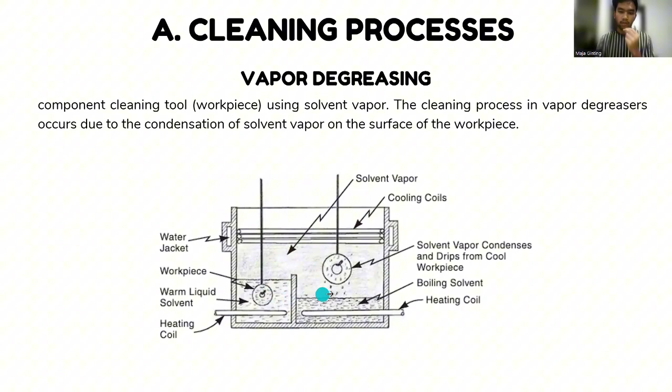Okay, and the next is the polishing process. The purpose of polishing operations, in addition to improving appearance, is to aid fluid flow, to remove burrs, to provide clearance for assembly, and to remove surface indentations that could be stress raisers or sites for entrapment of corrosive substances.

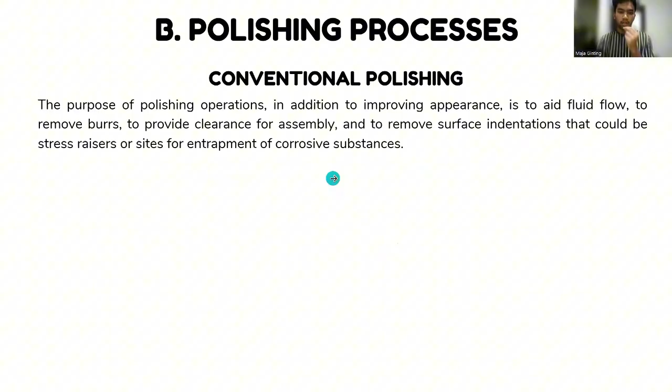Next, this is the plating process. This is the same as before. This is conventional electroplating, the process of coating a workpiece with another metal. This uses DC electric current. The electric current forces an oxidation reaction at the anode. This is the anode or plating metal, and this is the workpiece,

and the electrolyte in the box, and then this DC voltage forces the anode and makes the electrolyte and cathode react so that metal is deposited on the workpiece.

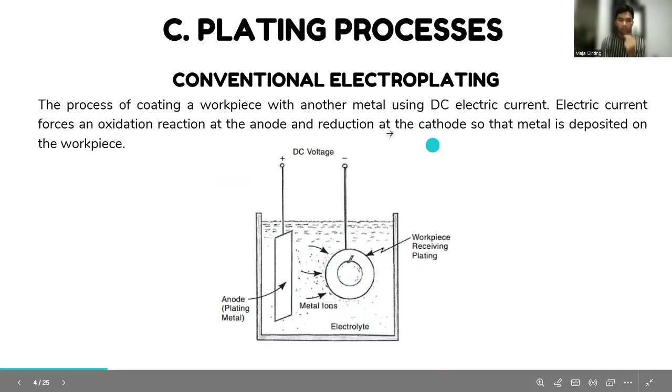Okay, next this is painting, organic finishing. In this illustration, there are the valve and pressure air. This is the paint. This makes a curtain of paint. A coating method in which liquid paint is pressed out to form a falling curtain. Then the workpiece is passed through the curtain so that the surface is evenly coated.

In this illustration, we see the pressure air. The pressure air passes the valve and makes the paint move vertically and makes the curtain of paint. Before that, there are a stationary knife and an adjustable knife to cut and make the opening smaller or larger.

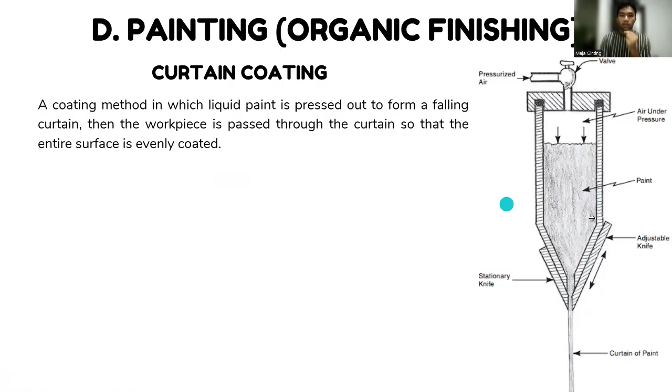Next, this illustration is about electrostatic spray for powder coating. This is different from before. This uses air to propel the paint powder into the spray gun, where it is given a high electrical charge and then sprayed onto the grounded workpiece, and this is the workpiece. Electrostatic force causes the powder to adhere evenly, then melt in an oven to form a hard, durable coating.

In this illustration, we see the compressed air input, then the powder hopper and the compressed air control valve. To make all of this work, this is the high voltage cascade generator and the negative to the ground.

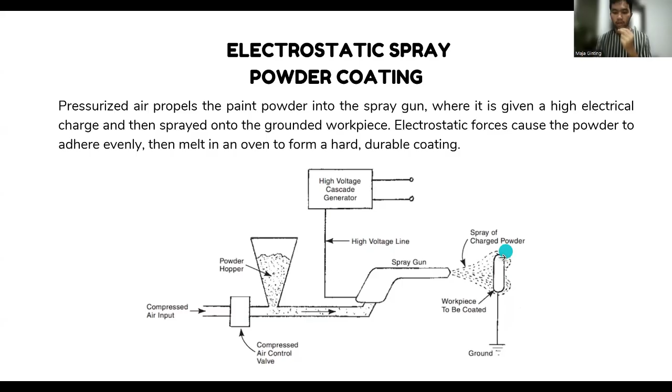And this is fluidized bed powder coating, another method. In fluidized bed powder coating, compressed air is used to float the powder in a container. We can see in the illustration there are many parts of this component. The main part is the input air passing through the porous ceramic plate vertically, and this input air goes to the plenum chamber and through the ceramic plate,

and this workpiece is heated above the fusion temperature of the powder. And this is the fluidized powder. The powder sticks and melts on the surface of the workpiece, forming a protective layer after cooling.

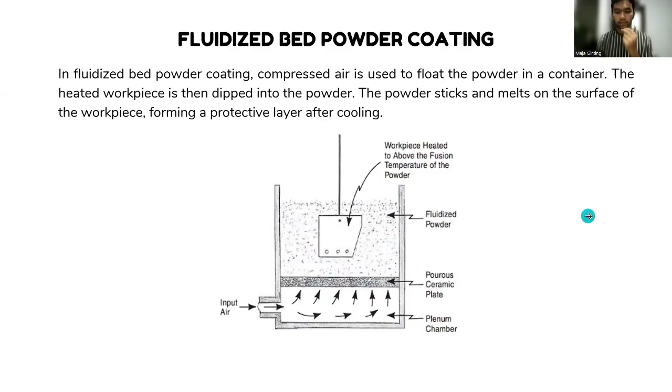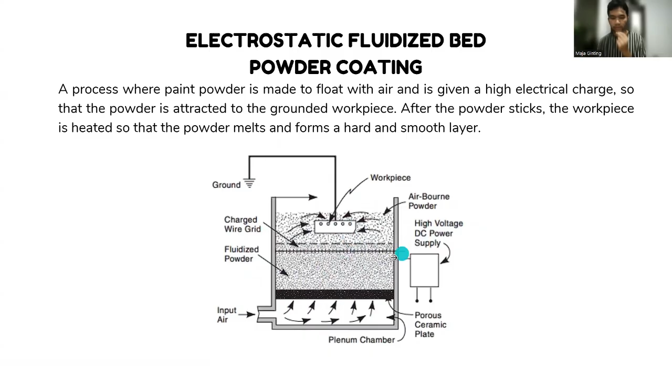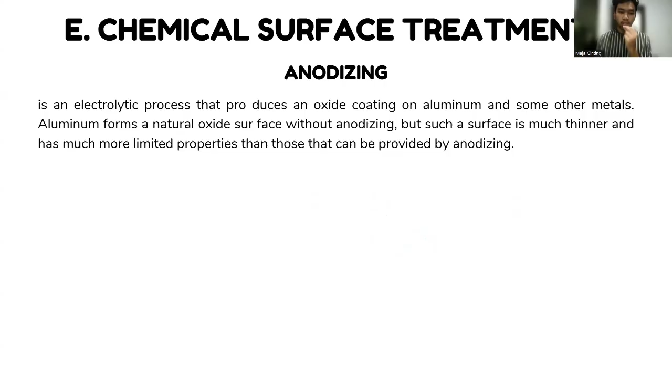Next, chemical surface treatment. The anodizing method is an electrolytic process that forms an oxide coating on aluminum and some other metals. Aluminum forms a natural oxide surface without anodizing, but such a surface is much thinner and has much more limited properties than those that can be produced by anodizing.

And then other coatings. This is the vacuum metallizing. In this illustration, the vacuum pump, and this is the vacuum and electrical potential, and there is metal being vaporized. This is the workpiece being vacuum coated. Vacuum metallizing is a process of coating thin metal by evaporating the metal in a vacuum, then condensing it on the surface of the workpiece.

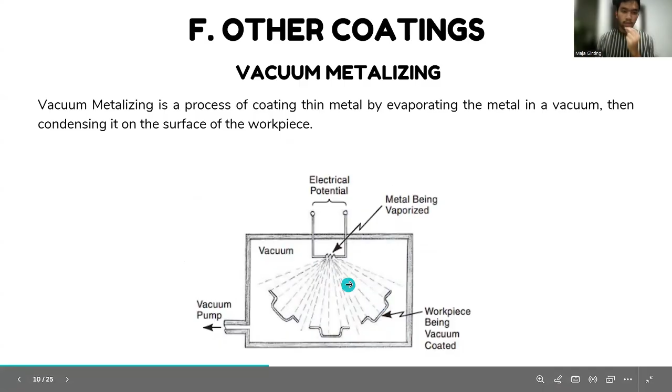Next, this is the sputtering. On the illustration, we see the high voltage for the deposit substrate coating, and the negative high voltage for the target or workpiece. And in the cathode, there is cooling water to make the target not hot and not cold, so make sure it is not broken.

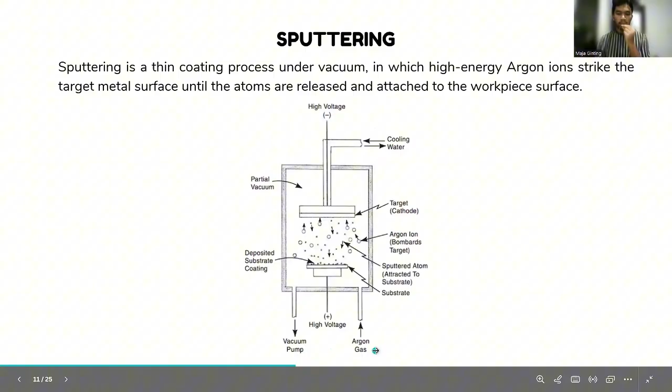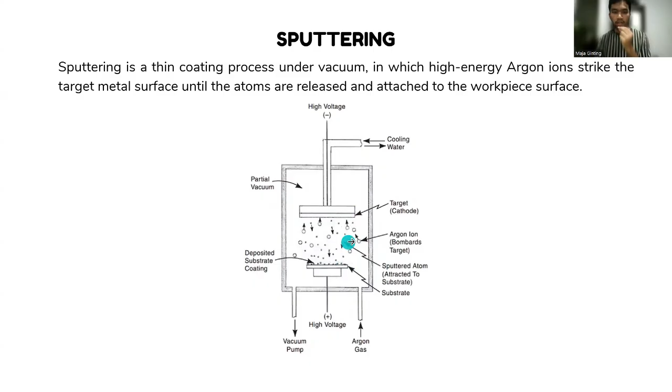And there are the sputter coating, vacuum pump, and argon gas. There are argon ions, the target, and sputtered atoms attracted to the substrate, and the partial vacuum. Sputtering is a thin coating process under vacuum, in which high energy argon ions strike the target metal surface until the atoms are released and attached to the workpiece surface.

Next, wire metallizing. We see many components. There are oxy-gas, wire, and this is the compressed air passage, nozzle assembly, and air envelope. And there are so many parts of the component, and this part characterizes the flame, burning gas, melting wire, and air envelope. This is the atomized metal, and then the sprayed metal coating, and this is the substrate.

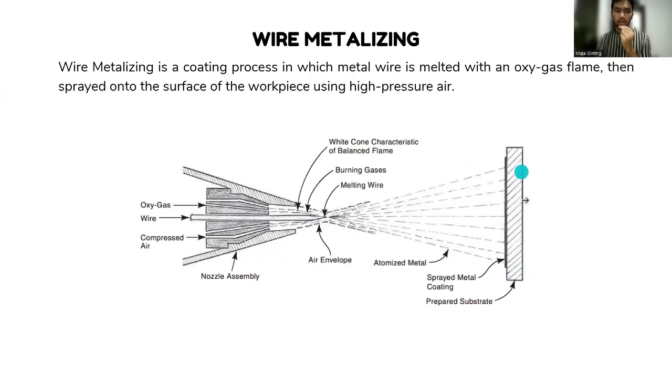Wire metallizing, this is the wire. It is a coating process in which metal wire is melted with an oxy-gas flame, and then sprayed onto the surface of the workpiece using high pressure air, making the coating on the surface of the workpiece. And then electric arc wire metallizing.

This is the same as before, but a little different. This is the electric arc wire metallizing. There are two wires, and this is compressed air and the nozzle. This is the reflector plate, wire guide, and this is the arc, and it melts when compressed air and wire combine in this situation. The arc will melt, and because of compression it will spray dust onto the surface of the workpiece. And this is the sprayed metal coating on the surface of the substrate.

A metal plating process that uses two metal wires as electrodes, and when their edges touch, an electric arc is generated that melts the wire. The resulting molten metal is sprayed onto the workpiece surface with high pressure air, forming a strong corrosion resistant protective metal layer.

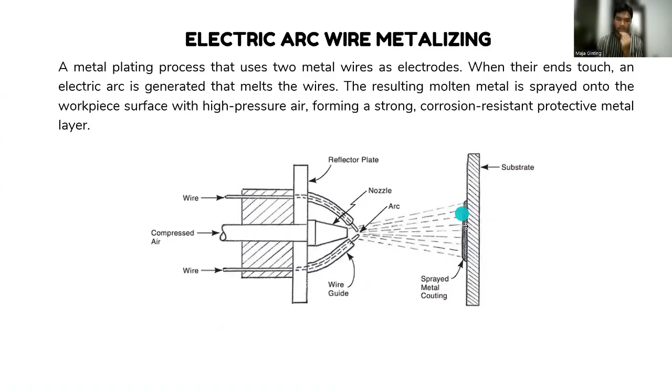The powder is carried by a carrier gas, then melted by hot gas and fired onto the surface to form a protective or functional layer on the metal substrate.

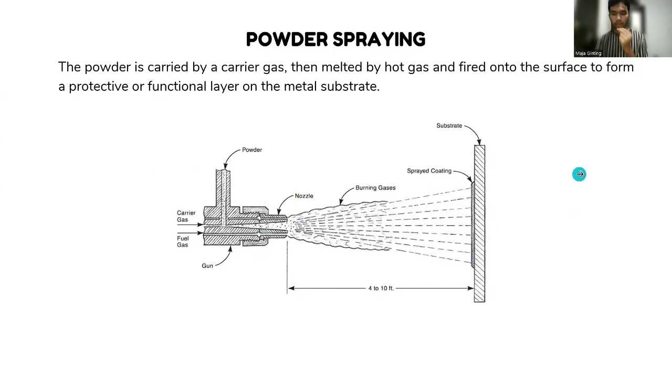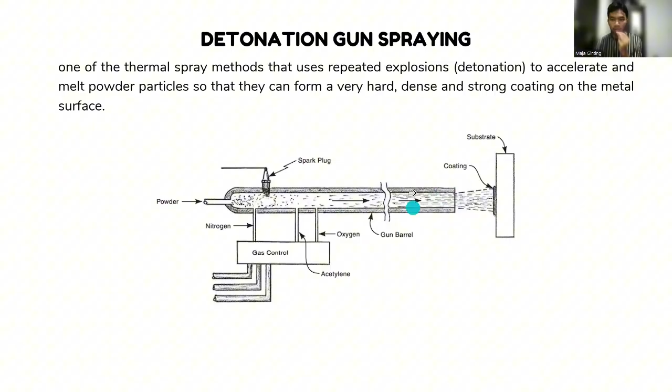And then plasma arc spraying. One of the plasma spraying or plasma thermal spraying techniques, this technique uses a very high temperature plasma jet, about 10,000 to 15,000 Celsius, to melt the material powder and attach it to the substrate surface as a coating.

So this is for the coating, and plasma gas, and there is DC power for the arc and electrode. This is the arc and the nozzle, and this is the powder in carrier gas and the plasma flame, and this is the sprayed coating on the surface of the substrate.

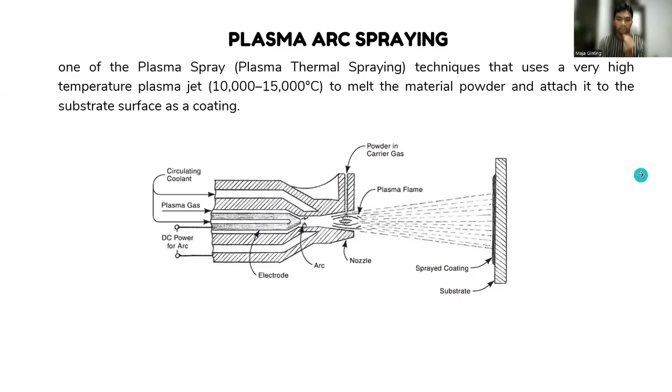And then high velocity oxy-flame coating. This method is one of the thermal spray techniques that produces very high spray speeds, about 700 to 1200, with temperature high enough to melt the powder, but not as high as plasma spray.

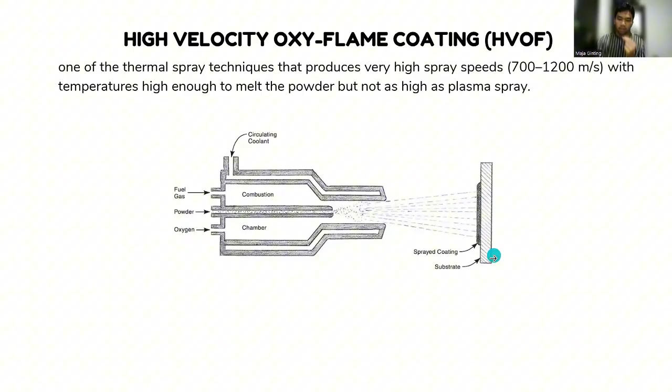The process is the same, but a little different from before. This is the fuel gas, powder, and oxygen. This is the chamber and combustion, and circulating coolant to make sure the component does not melt. And when the fuel gas, powder, and oxygen are in the chamber, they go out to make the spray coating, and this is the coating on the substrate surface.

And next, heat treating of metals: annealing. We can see the diagram of the annealing. This diagram shows the microstructure phase change in iron carbon when heated or cooled with different carbon composition. This is for the temperature and the percent carbon. We see the temperature and the percent carbon until 0.77.

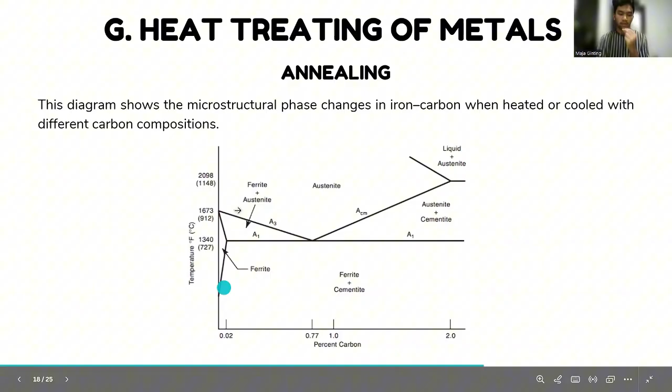And this area is austenite, this area is ferrite, and this area is ferrite plus cementite. We can read the process of this composition with this diagram. And this is the isothermal annealing.

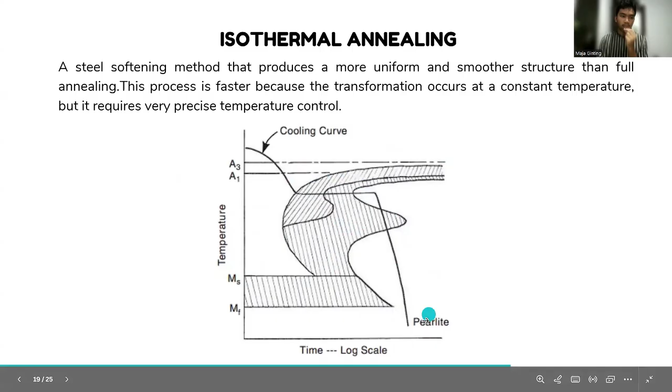This is for temperature and time on a log scale. This is the cooling curve, and the cooling curve makes it become pearlite. So it's a steel softening method that produces a more uniform and smoother structure than full annealing. This process is faster because the transformation occurs at constant temperature, but it requires very precise temperature control.

And then carburizing. Carburizing is the process of adding carbon to the surface of the steel by heating the steel in a carbon-rich environment. This is the carbon-rich heating, and this is the workpiece. And there is coke or charcoal. Carburizing aims to make the surface hard while the interior remains ductile.

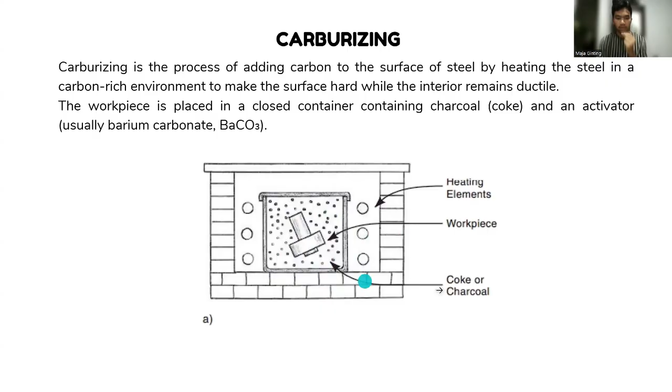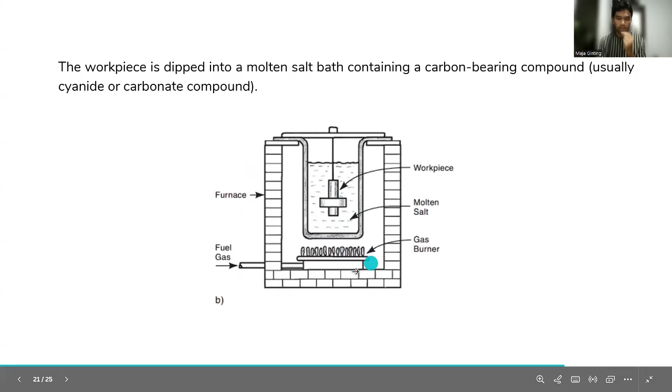The workpiece is placed in a closed container containing charcoal or coke and an activator, usually barium carbonate. And here the workpiece is dipped into a molten salt containing a carbon-bearing compound, usually cyanide or carbonate compounds. This is the fuel gas and furnace, the workpiece and molten salt, and the gas burner.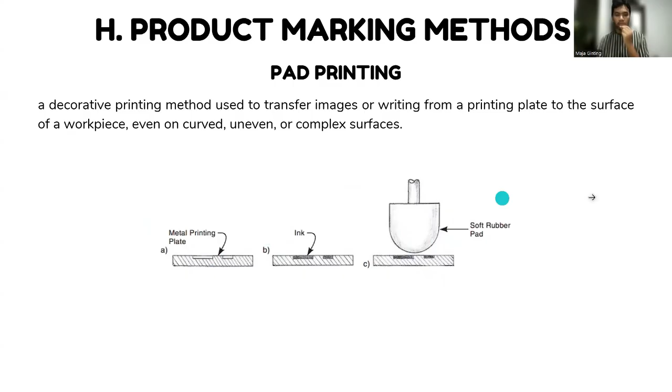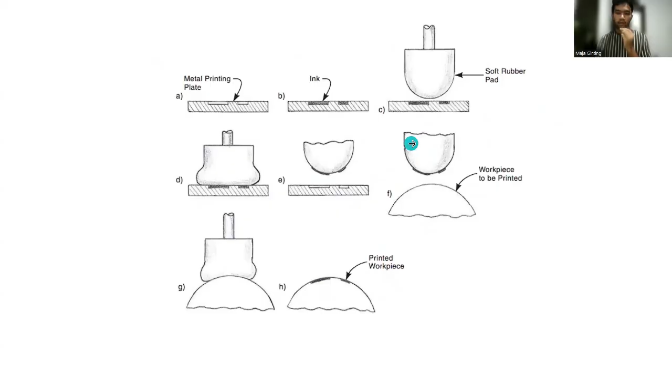And there are many processes for making printing for the workpiece. We can see the methods of the rubber pad and the workpiece to be printed, and this is the printed workpiece. This is all of the process for the printing for decoration, and this is the printed workpiece.